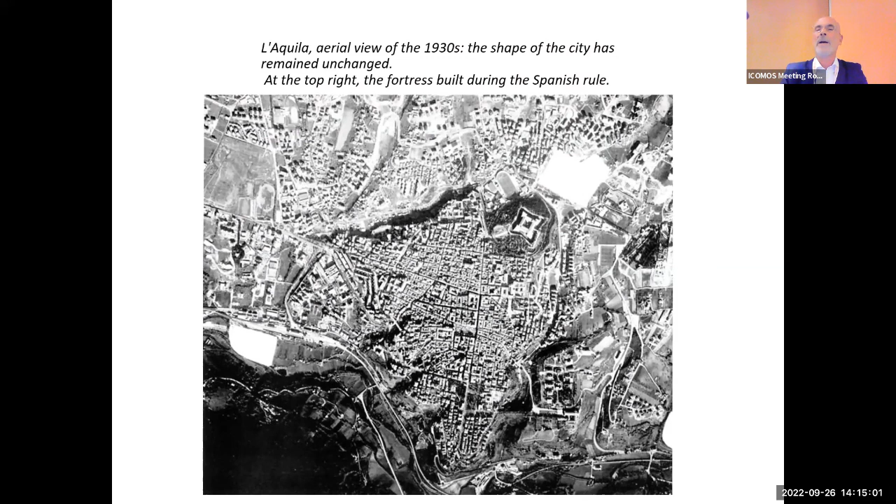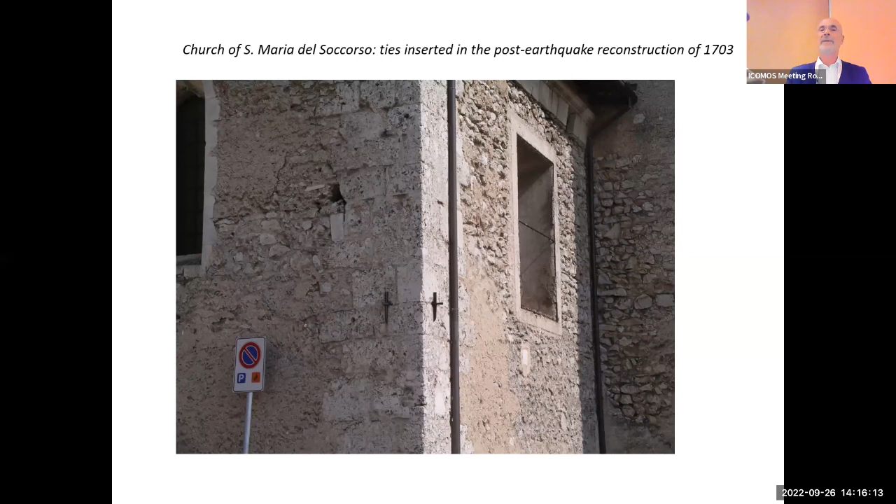Here you can see the church of Santa Maria del Soccorso, a medieval church near the cemetery of the city. And we can see also that the cracks in the recent 2009 earthquake are the same as the ancient cracks from the 18th century. But during the 18th century, a lot of traditional systems were used for seismic damage mitigation, like iron beams, like in this example, which were very useful to reduce the damages after the earthquakes. In many cases, these kinds of beams are inside wooden beams, and outside only the keys, let's say, are in iron.

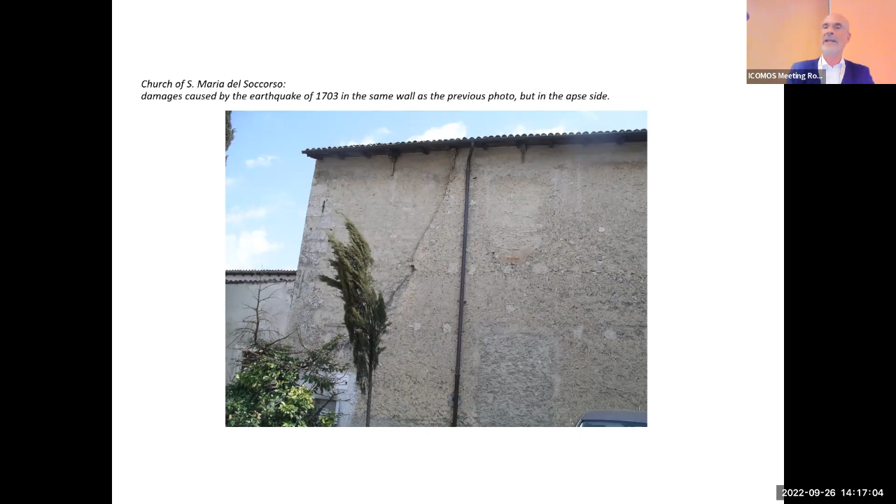This is the 18th century reconstruction of the Santa Maria del Soccorso with the ancient cracks, but the church generally resisted the modern earthquake. I mean, L'Aquila, the city wasn't completely destroyed, but was seriously damaged. It was possible to resist thanks to the ancient solutions. I would like to remember that the main damages were especially in buildings built in reinforced concrete or altered, modified and transformed with modern reinforced concrete.

And what about the general organization of the reconstruction? There were four levels. First of all, the construction of new houses for the population outside the historical center of the city with modern anti-seismic systems, the project called in Italian Case. The first level during the first 12 months. The second level, the plans for the reconstruction of historical centers with direct funding by the state and also the cooperation of the universities.

There were special plans of reconstruction, but also for the new economic development of the region and also of the different towns hit by the 2009 earthquake. Of course, there were also autonomous interventions for private buildings, especially in the surroundings and the modern districts of the cities. And the fourth, we are talking about this level, interventions under the direct control of the Ministry of Culture. In Italy, we have the general organization, but also local with the superintendents, especially for listed buildings, according to our national law for protection of historic buildings.

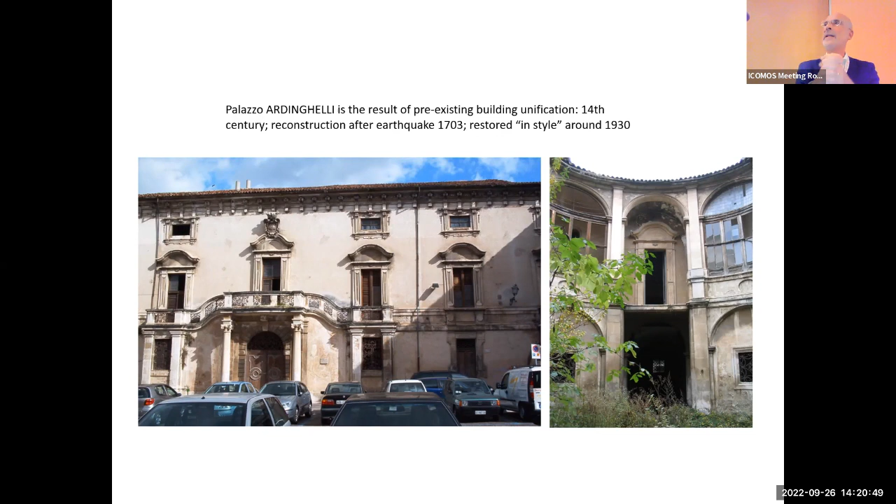And there was also general restoration in style, let's say around the 30s. Notice that the building was abandoned before the restoration, before the earthquake, the 2009 restoration. This is a great problem we're talking about.

We studied the building before the 2009 earthquake with my students. It could be interesting also. Here we are talking about formation and education of architects. And so we had surveys and also the study of documentation of the ancient plans of the buildings. And we could participate in the general design, the general project of the restoration.

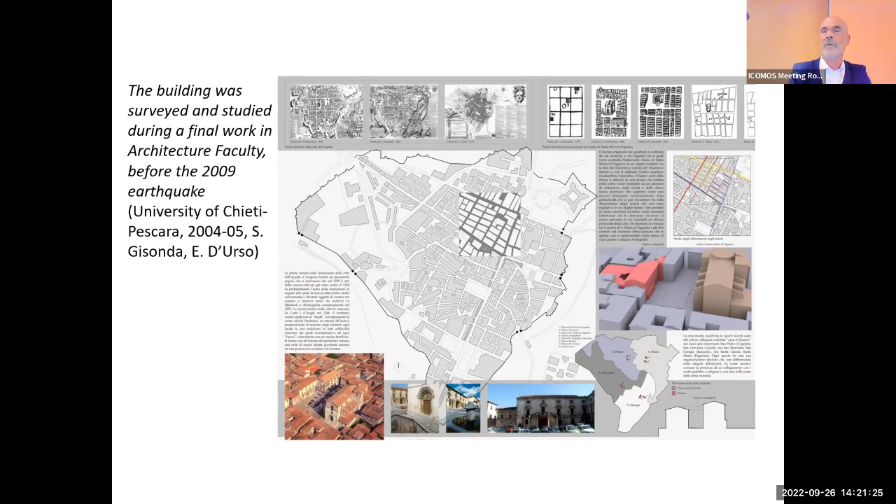In the survey, we can see the main building from the 18th century, facing the square and the church of Santa Maria Paganica on the other side. The new courtyard, very interesting, with an exedra at the end, and different rooms and different apartments in the rear building.

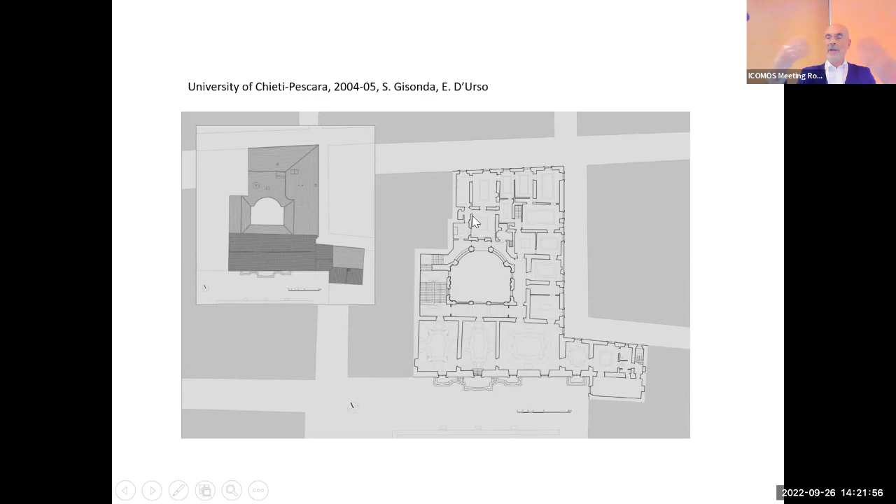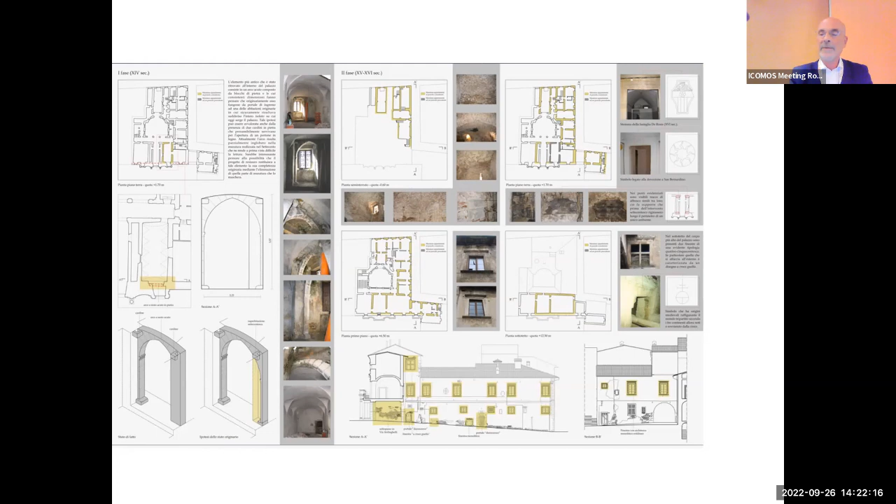The studies also point out that the building was really, I can say, a mixture of different times and different techniques, which is possible to recognize in the modern construction. And also it was possible to study all the ancient techniques for the reduction of seismic damages, like, for instance, this specific construction of the cornicione, of the main frieze at the top of the building, with brick and inserted stone to reinforce the construction.

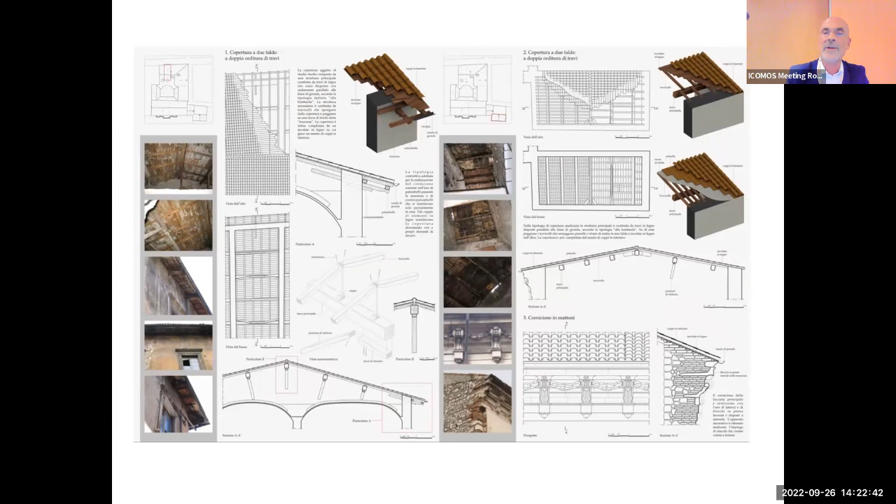And the earthquake. The effects of the earthquake are typical, like in all the city, because at the exterior, the building was more or less preserved, but in the interior, there were many collapses of many parts. But this is because the general behavior of the structure was more or less safe, thanks to the iron ties realized during the centuries, but the inner apartments, the inner walls collapsed.

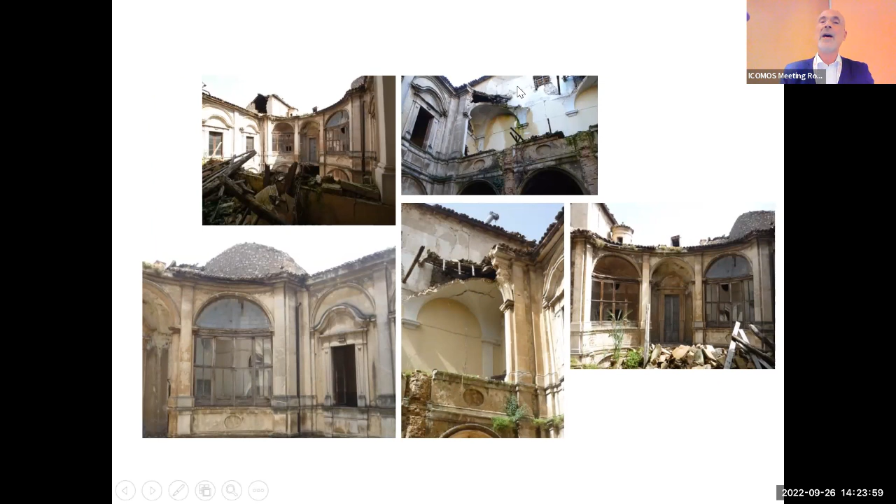And especially the roof, because the roof was completely abandoned, without maintenance during the last years. I remember that the building was abandoned. This is the interior with the inner courtyard with the system of arches, the inner loggia. That is this one and this one too. The situation after the 2009 earthquake. And these images are during the first phases of the reconstruction.

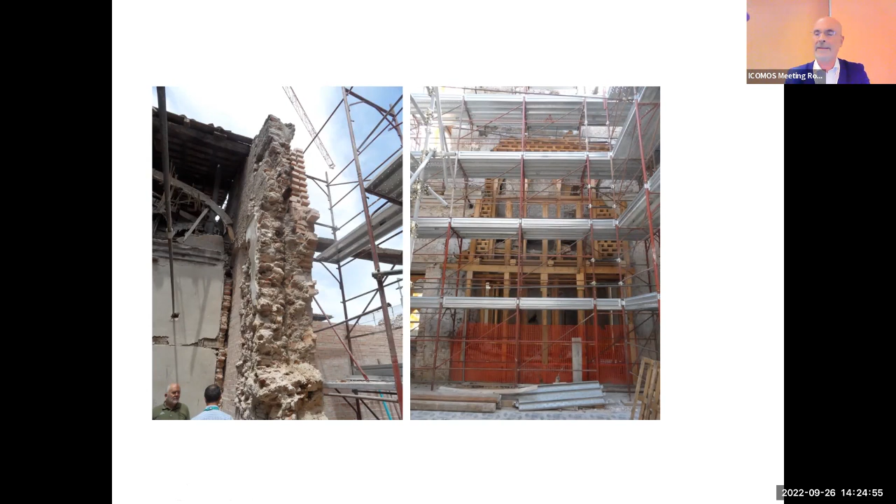Here at left, you can see how the walls are built in our cities. That is, there are 2 or 3 walls close to one another, many times with wooden beams inside, in order to create these ties inside the walls. And you can see also a kind of false vault. I mean, after the reconstruction, generally the builders try to avoid a real vault, preferring a vault built in wood with reeds and finishing in stucco.

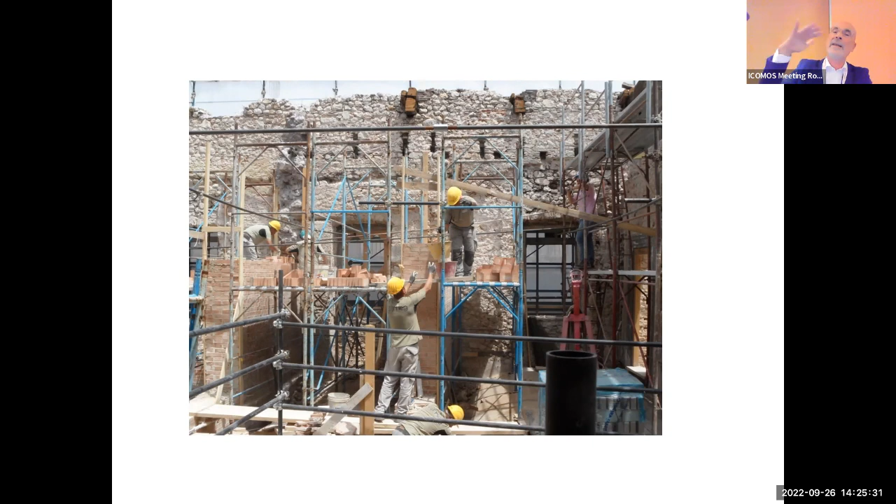And the situation after the earthquake and the start of the yard: much of the rear part was rebuilt in modern bricks. Here we had the consulting of Professor Lagomarsino from Genoa University. But the exterior box, let's say, was totally preserved. It was also useful for us to study the stratification of the different layers of building phases inside the history of the building. And our students were able to also work with the workers, because they helped to recover the parts, the ashlars of the windows, and also to recognize the different parts in order to create a great anastylosis of this building.

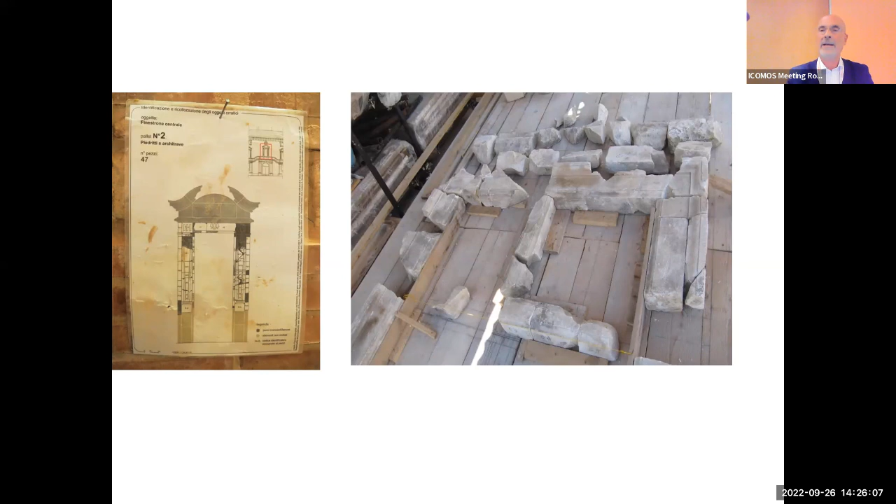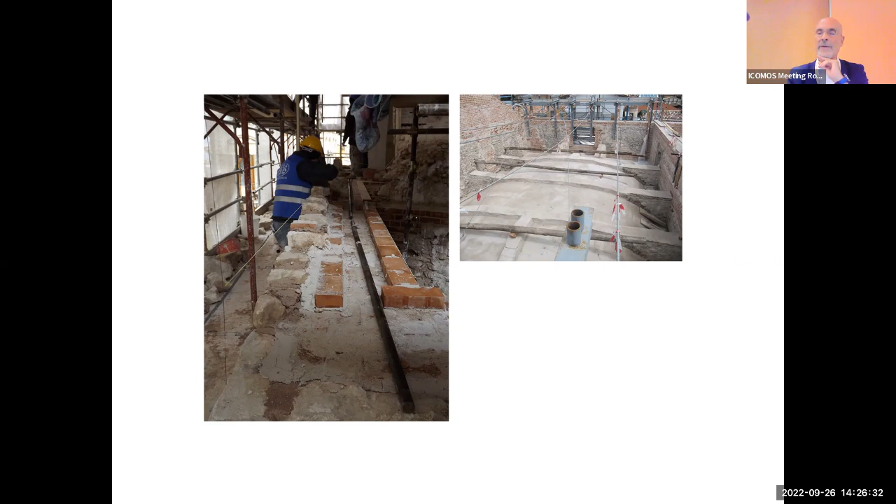At right, you have a classical window from the 15th century with a cross shape. The big problem was especially the inner court, with the system of arches completely collapsed, and rebuilt also the vaults. Here you have at right one of the vaults in the original state, with wooden ties along the space, along the same vault. So this is the reconstruction, the main loggia.

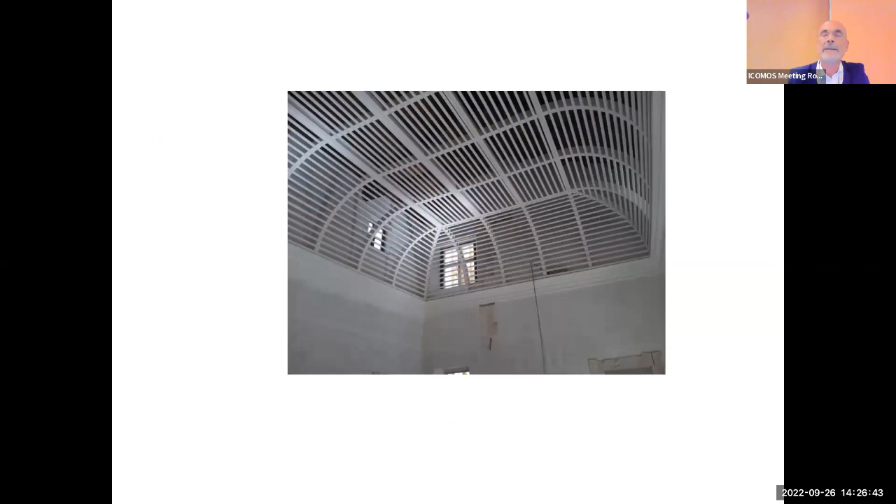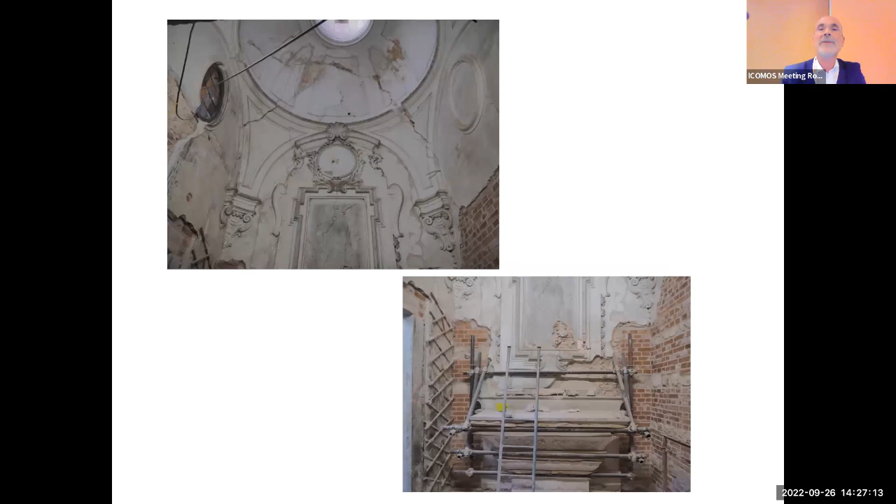For some vaults, it was impossible to rebuild the wooden vault because they were completely collapsed. We had no traces of that. So this was an invention to create just the structure, to give the idea of the original vault and give also the possibility to see the different layers of the construction outside the structure of the vault. And also the chapel with interesting stucco work from the 18th century.

But the real important decision for the building was when the Ministry of Culture decided to put here the venue of the Museum of Contemporary Art, of 21st century art. And so the restoration was accomplished with also the preservation of the finishing, the intonaco, the plastering of all the buildings. The plastering wasn't demolished or redone; they are still the original plasters.

Inside the court, the new design for the floor, and also the use of contemporary works of art by local artists, but also with an international relevance, like Nunzio and especially Ettore Spalletti, who reinterprets the inner space of the chapel with this colonna nel vuoto, the column in the empty.

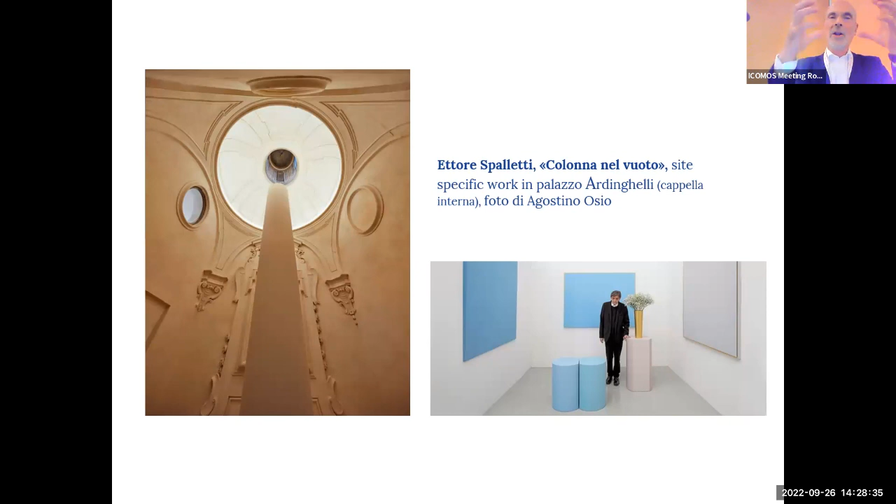And in front of Palazzo Ardinghelli, we have Santa Maria di Paganica, because Paganica was one of the villages that participated in the foundation of the city. So each village had the right to build its own church in its own district inside the new city. It's a project group of architects, engineers, archaeologists, art historians.

I'm one of the consultants. The church has a very complicated history from the Middle Ages, from the foundation in the beginning of the 14th century. Great reconstruction after the 18th century earthquake, of course, which completely transformed the church, and also great restorations in the 20th century, restoration in Viollet-le-Duc style, let's say.

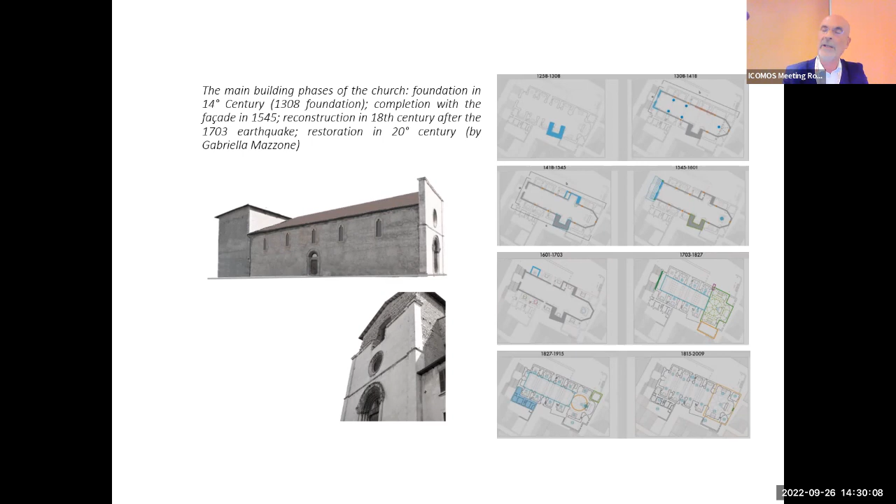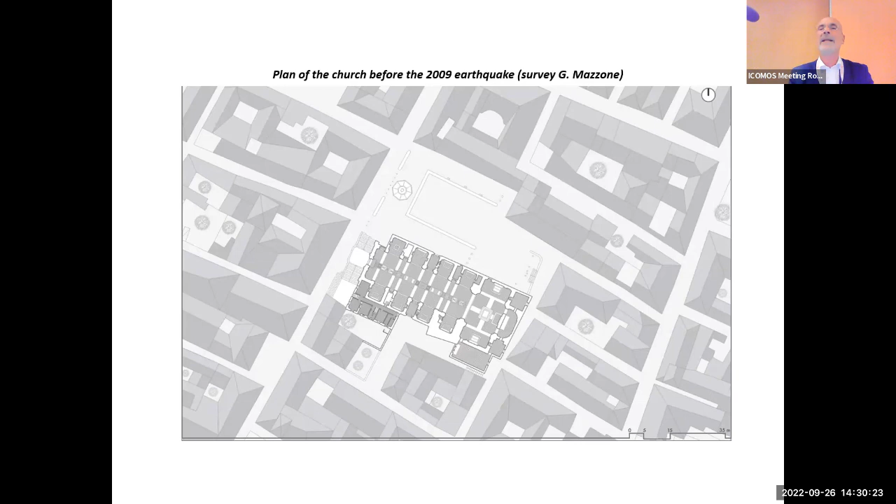And we have the general plan of the church in front. Let's say, in the upper part of the image, you can see the plan of Palazzo Ardinghelli. So we are just facing the Palazzo Ardinghelli. The interior of the church after the Baroque transformation. So it's a good example of this continuity between Baroque and medieval architecture, which is the root of the L'Aquila identity. The citizens of L'Aquila are very proud of their history and their identity.

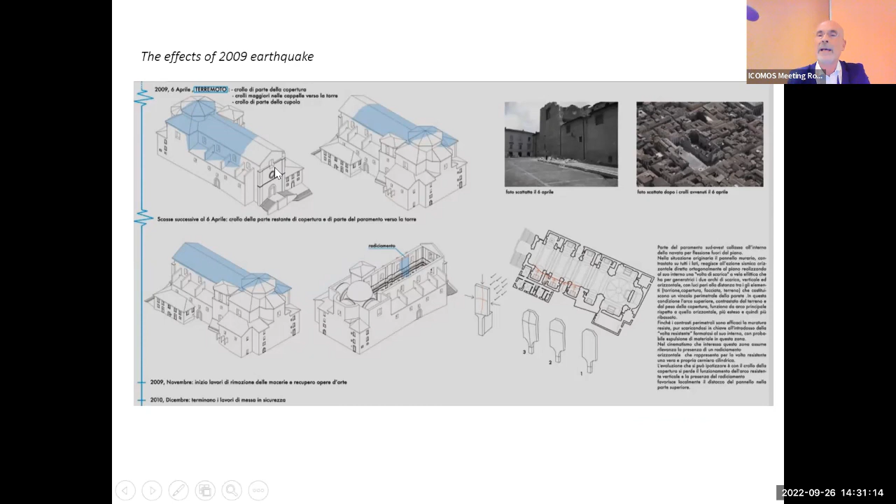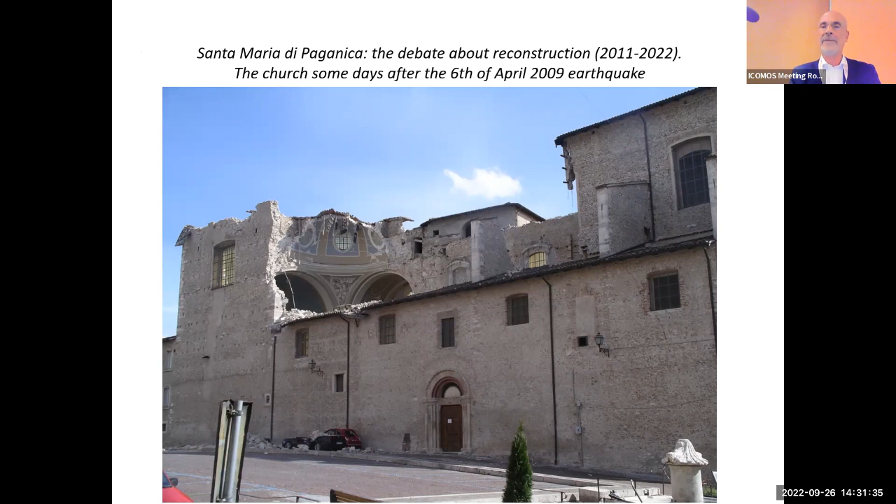But the damages of the 2009 earthquake were serious because a great part of the roof collapsed, also the masonry of the main nave and the dome. So a great part of the church has completely disappeared. This is the situation after the 2009 earthquake. This is a picture of us, I think it was the 8th of April, maybe, or 10th of April. The dome collapsed, the nave collapsed, and it was possible also to understand why.

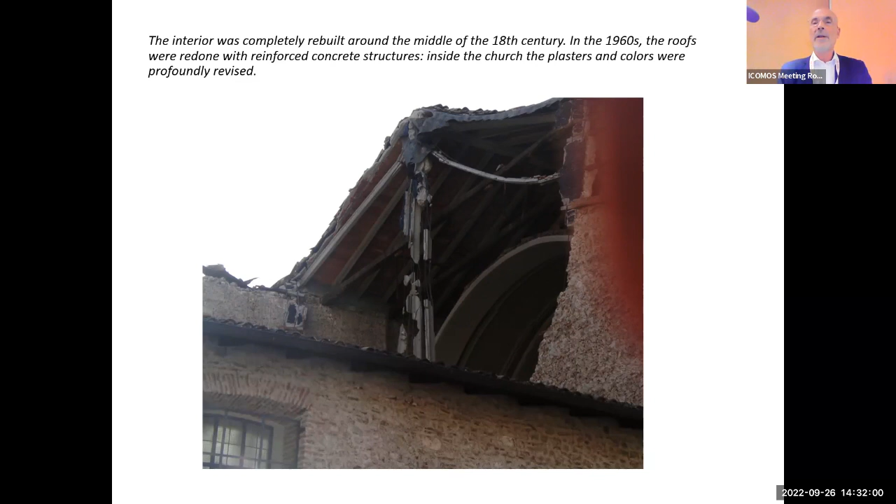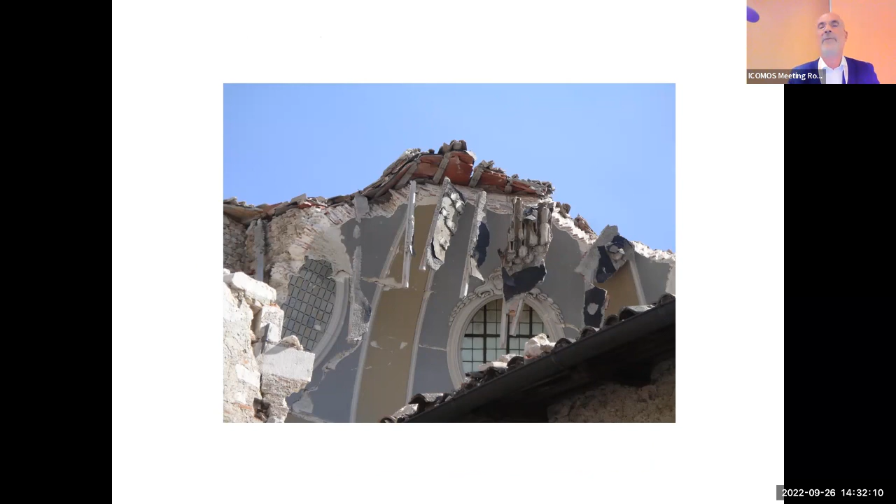One of the reasons is because the roof was rebuilt with a reinforced concrete structure during the 60s restoration, and also in the interior, the colors were deeply revised. And look at the state of the dome. We can see also the structure in the roof in reinforced concrete.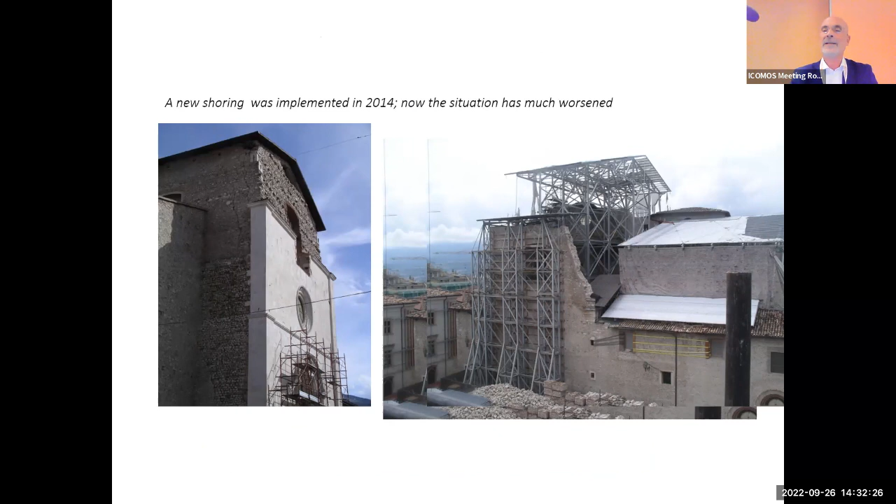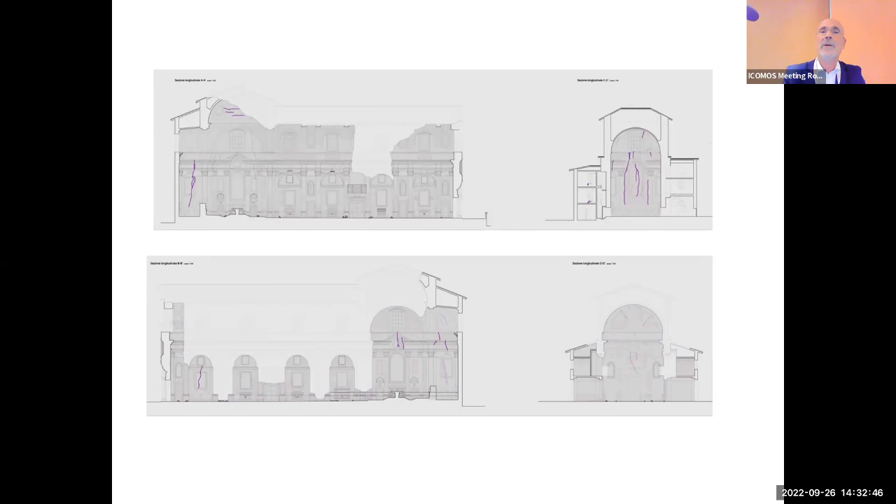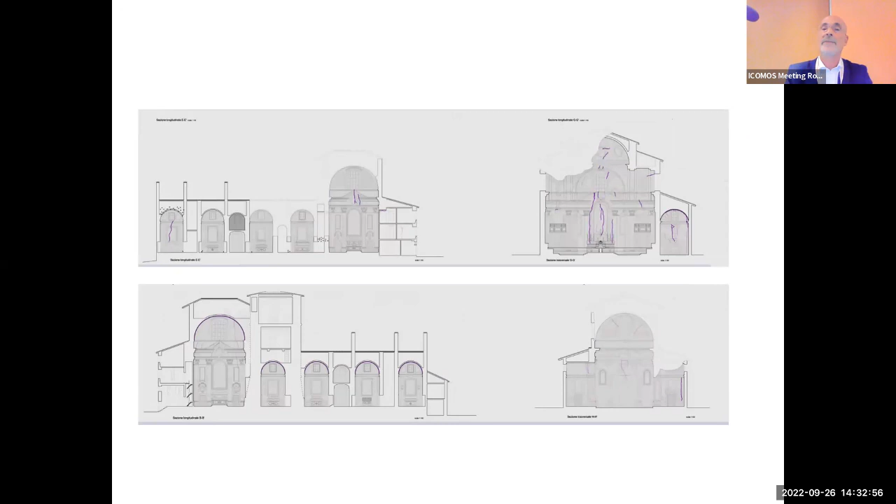New shoring, we are now in 2014, but the church has not yet been rebuilt or restored. And also in this case, we worked with our students for a project, and we participated with this project in the group of consulting. This is the situation after the earthquake, with the collapse of the main part of the nave of the church. This was the situation in 2011, more or less. This is maybe the original part of the church.

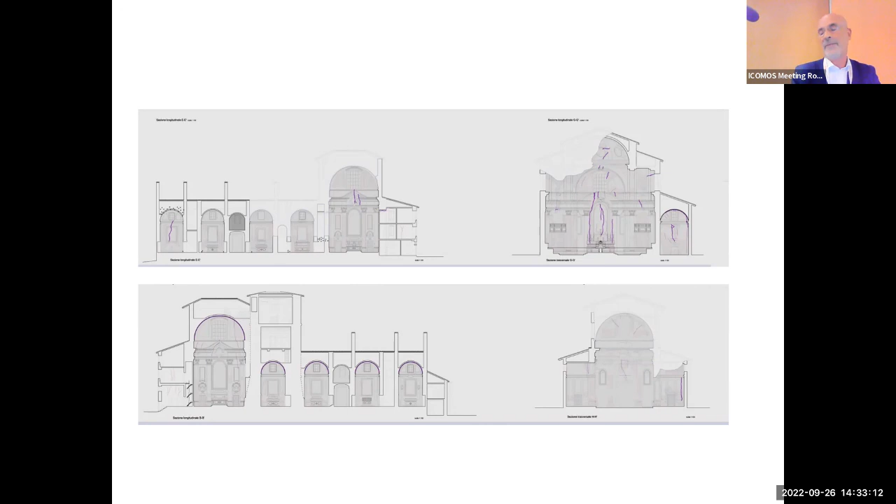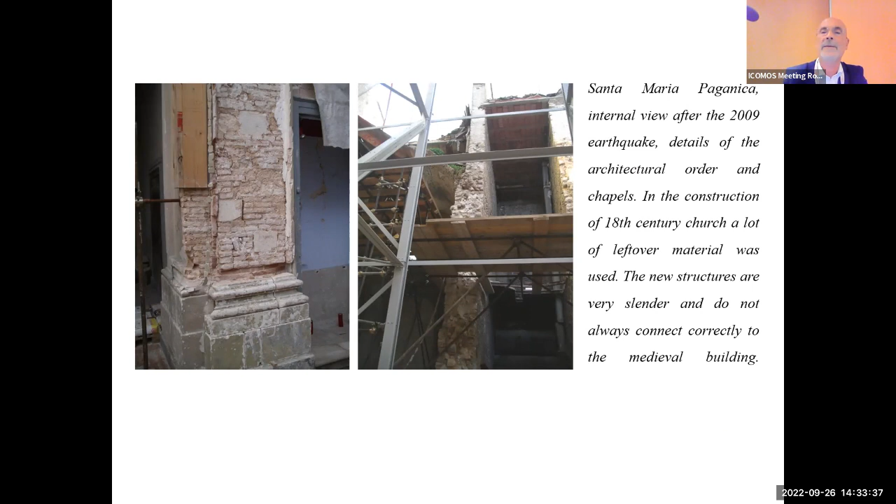I mean, the bell tower probably is one of the defensive towers inside the city, transformed into a bell tower during the 14th century. And the inside situation is especially difficult, especially in the chapels, because it was possible also to understand that the 18th century rebuilding wasn't perfectly connected to the medieval structure. So there was different behavior under the hit of the earthquake. And the main altar and the apsis, and also the stucco work, are basically from the 20th century restoration.

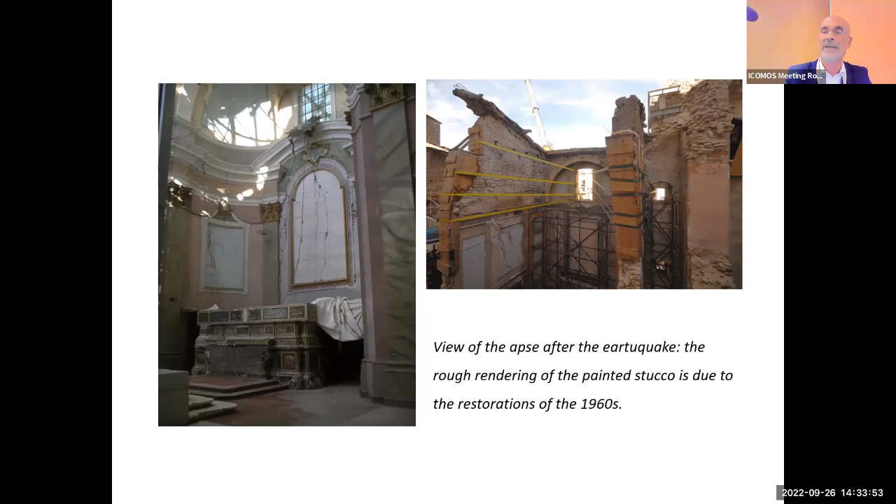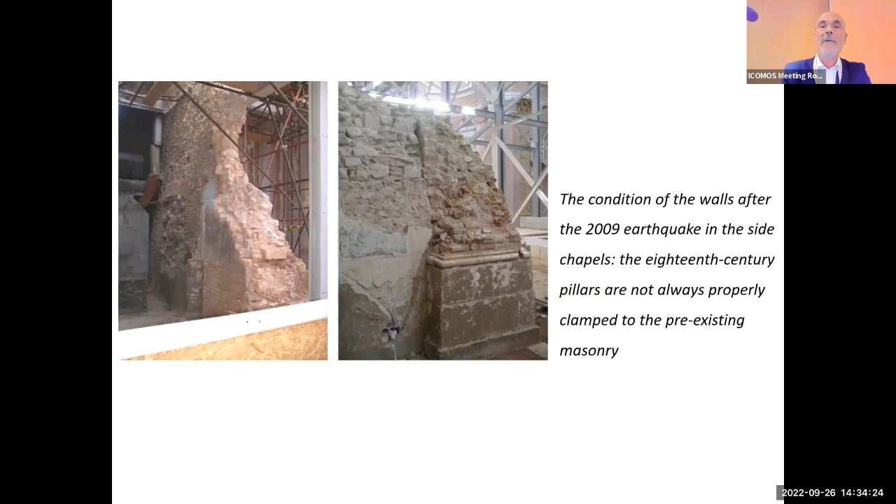Also, the condition of the masonry is really poor, like many other examples in L'Aquila, and you can see very easily the different masonry close to each other, not really well connected. It is one of the more important causes of the general collapse after the 2009 earthquake. It's interesting also to see the knowledge of the ancient builders about the damages caused by earthquakes. This is the cornice, the cornicione, which is not made like in many cases in Italy with stones, but is made in wood, short cantilevers, short pieces of wood, and then plastered. So they aimed to make this building lighter, not so heavy, for resisting earthquakes.

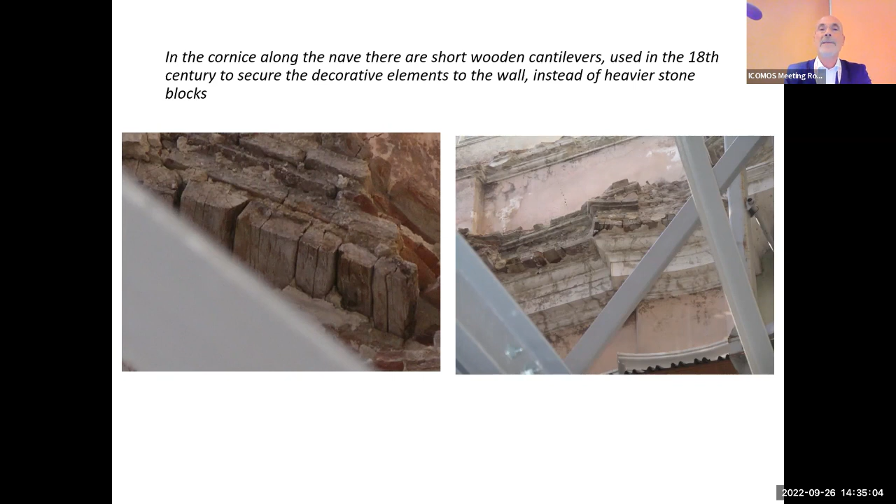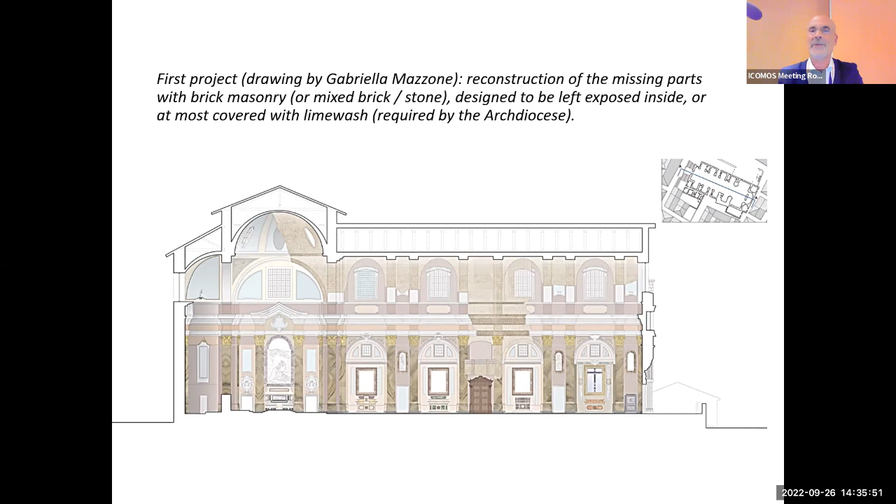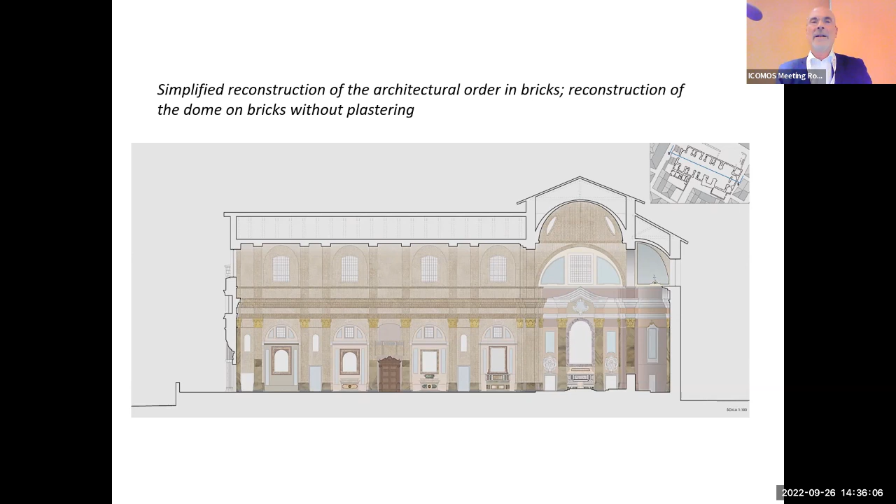The debate, or the not debate, I don't know how to say, about the reconstruction, because of this project commissioned by the Archdiocese of L'Aquila, very difficult to say. The Archdiocese wanted to rebuild as it was and where it was, of course. We tried to imagine a project with free bricks, also maintaining the original structure of the church, especially for the architectural order. The church was more or less in two levels, the chapels and the reconstruction in bricks. They asked also to use a lime wash to cover the bricks.

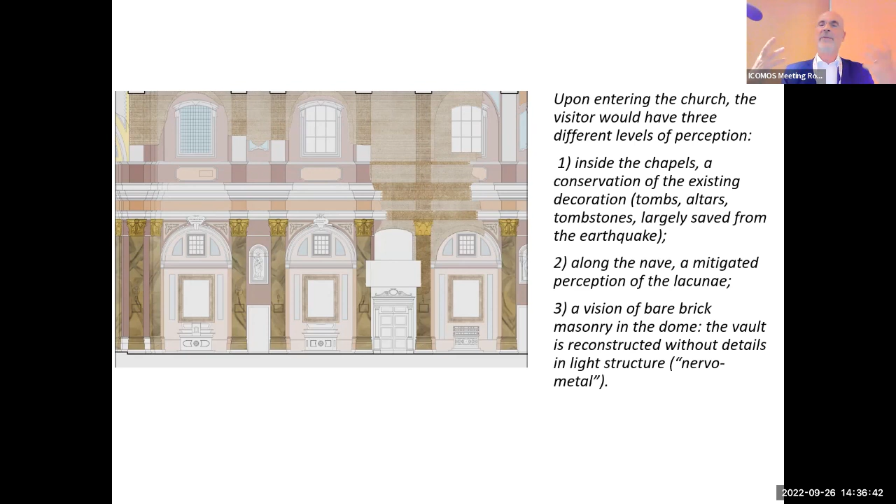We tried to discuss, it wasn't decided, but more or less we had three levels inside the chapels: conservation of existing decorations, so all the tombs, altars; the second level, the perception of lacunae, especially with the brick reconstruction; and in the upper part of the church, especially in the dome, the view of total reconstruction, thanks to the bare brick masonry. And also, this is a part by Professor Giorgio Monti, with the reconstruction of arches and beams to reinforce the upper part of the nave.

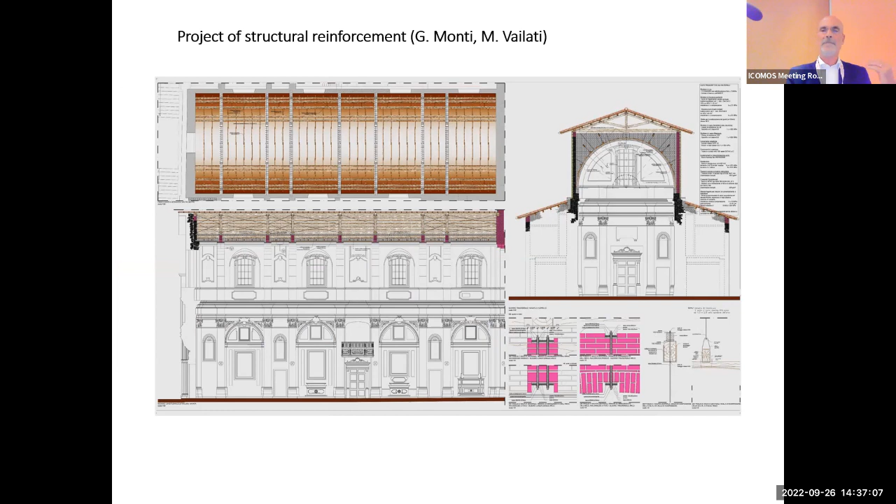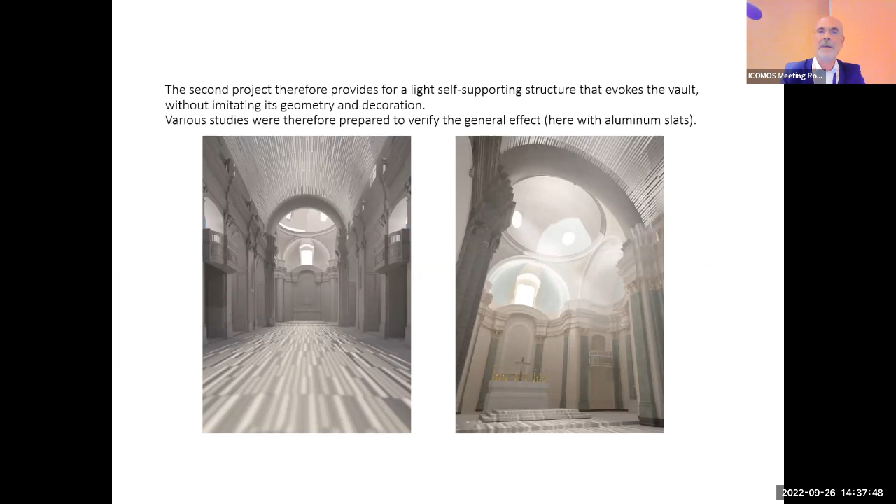But for the second project, the superintendents asked us to introduce some elements of modern architecture. So a contemporary language should be used, especially in the vault and the dome. And so we tried to change the project again, to imagine a self-supporting structure for the vault, echoing the ancient vault without reconstructing it. And we tried many examples, with this effect like a sky, but the final proposal, maybe accepted so far by the Soprintendenza, is to create a big shape for the barrel vault with a cut in the middle where light can enter, to give importance to the light according to the desire of the archdiocese.

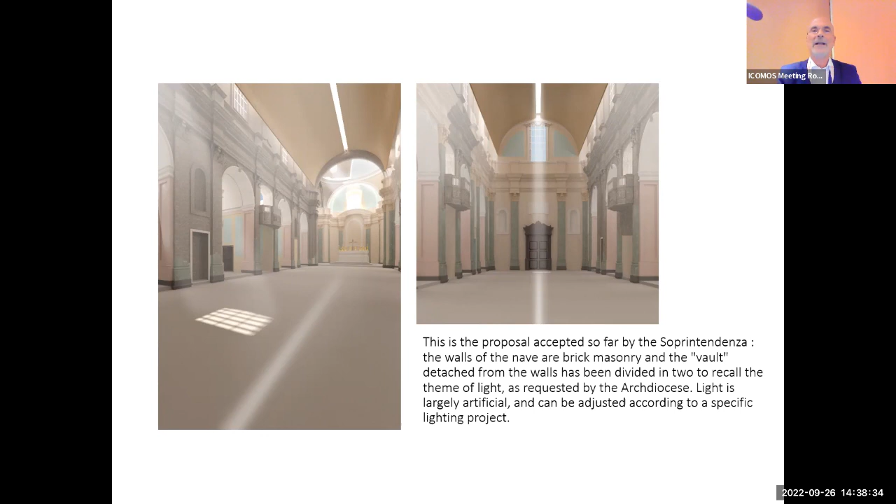But we are in 2022. I think that the archdiocese more or less is trying to make us understand that they want the church as it was and where it was, and the church is still in this condition. Please note that all that resisted after the 2009 earthquake has now collapsed. 13 years have passed since the earthquake without reconstruction.